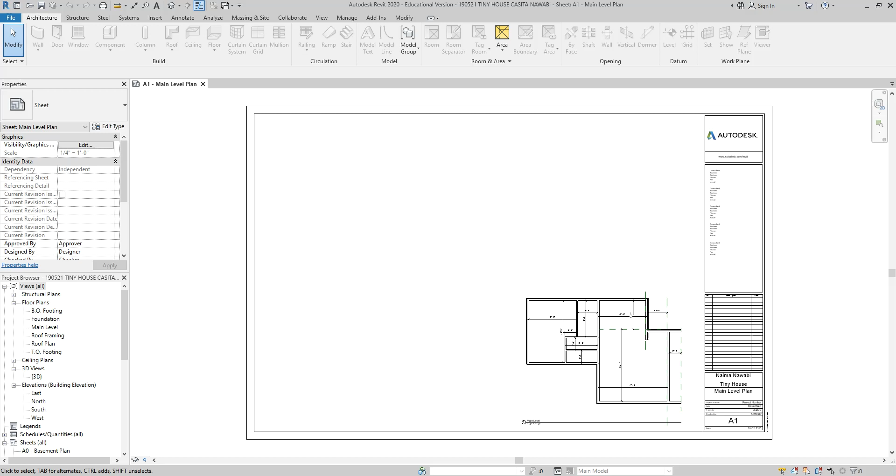Let's go ahead and get started. I know it's only been a couple days since we were here last, but to me it feels like it was a week ago. It's just been a really busy few days.

Just a quick show of hands - before class we were talking, and several people jumped right into the tiny house project. How many of you didn't have a chance to jump in? Okay, that's fine. So the people who were late also didn't have a chance to jump in. I'll let you analyze that for yourselves. Okay, let's leave that be for now.

I wanted to bring that up because maybe the few of you who were able to jump in could give me some feedback - not things that we haven't gone over, but of the things we have gone over, like starting up files, the things we think about when first starting a project. Was there anything that didn't feel intuitive yet, or didn't feel like it was on the way to being intuitive?

Does that make sense, what I'm asking? Or do you think we've gone over the step by step, this is what you do, to where you're like, okay, I think I get this rhythm, I just need to practice it? It feels pretty good. I think with practice it just gets even better. Starting out I felt a little slower, but I'm like, okay, I have to do it this way. In time.

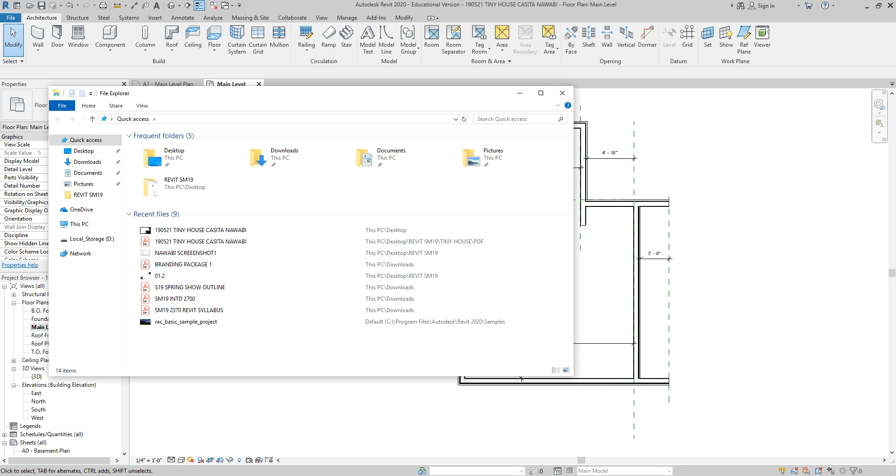Next week, what I'm planning on doing is the first hour of class, I'm going to give you guys a small floor plan - I'll download it before class. I'm not going to post this yet, but I want you guys to know what you're getting into. Let me pull this up - I'd like to jump ahead a little bit so that this weekend everybody will have time to work on Revit because of the assignment that's coming up, in case you feel there's something you need to practice before the first hour of next week.

So the first hour of next week, what I'm going to do is give you guys this small floor plan or something similar. My hope is that within that first hour, maybe less, you guys will be able to lay out this entire plan with the windows, the doors, and then maybe if you feel comfortable, even throw on a roof. I'm not sure, but if we're not going to do the roof, at least lay out a couple sheets for me. I'm going to have you guys turn in those PDFs as well as your Revit model - I'll look through those privately.

But then as a group, I'll have you guys get together in smaller groups again and analyze each other's models. For instance, Jules and Deshina, you might switch places, and Valerie, you might go with them. I want you guys to be able to click on each other's walls and say, oh, did you notice that these were unconnected?

I noticed when you were working on your screen, you're only working in floor plan. Did you remember to open up your other views to help you with those other things?

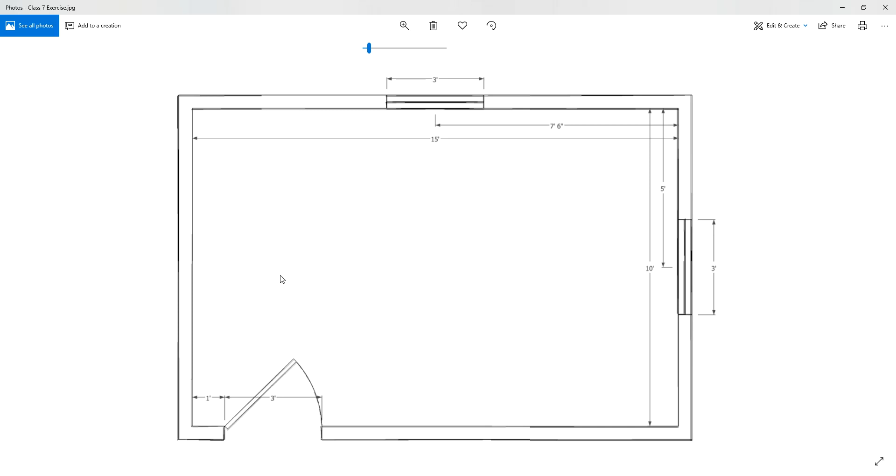Just remember, beginning of class I'll have that posted on Canvas, and I'll have it close, meaning it's due basically at like 7 or 7:05. I'll want your Revit model and your PDFs, but everything will be in Canvas as well as the rubric. So watch out for that next week.

Now for this evening's class, if you're okay, I'd like to jump a little ahead and start going into windows and doors. Tonight's class is actually supposed to be a review of walls and setting up the file, but instead I'm going to throw one more thing at you: windows and doors.

Next week, after you do your 1 hour, we'll see how things went, and I'll spend most of the rest of class hosting a lab, going over questions or things that didn't work out. If we get through those within another 30 minutes to an hour and a half, I'll do a quick introduction of the next topic, which will be some views.

Again, I'm trying to preserve as much lab time at the end as possible. So even if we end up 2 weeks ahead of schedule, that's great - that's 2 extra weeks we get to work on our final.

So are you guys okay if we just jump right into doors and windows, things like that? A quick question, please. Sorry, it never has to be quick.

I'm having difficulty just logging into Canvas even. Oh, what is it saying? There's an authentication error, and I just keep getting it, and I don't know why. Do me a favor, try to log in from your phone.

Coming back over here, I'm not going to spend any time reviewing our floor plans because I think by the end of class we all had the same thing. If you have questions on whether our floor plans are the same, or if something's off on yours compared to my screen, just hop into the YouTube lecture, fast forward to the very end of our last class, and you can verify those dimensions.

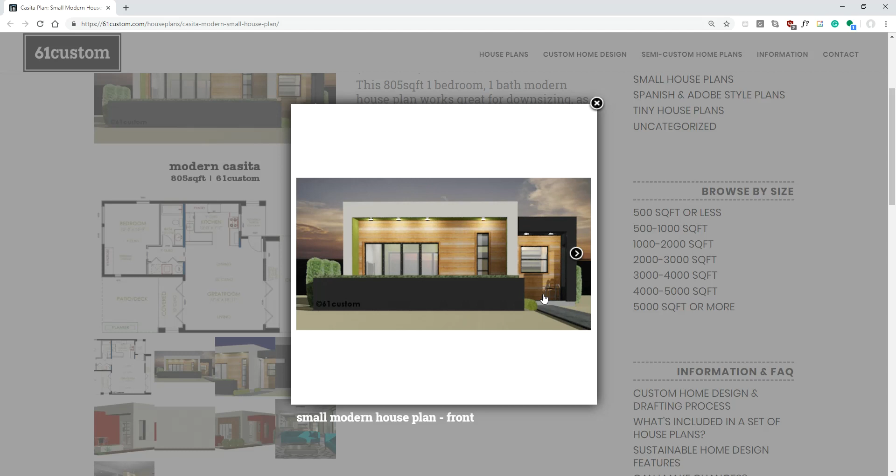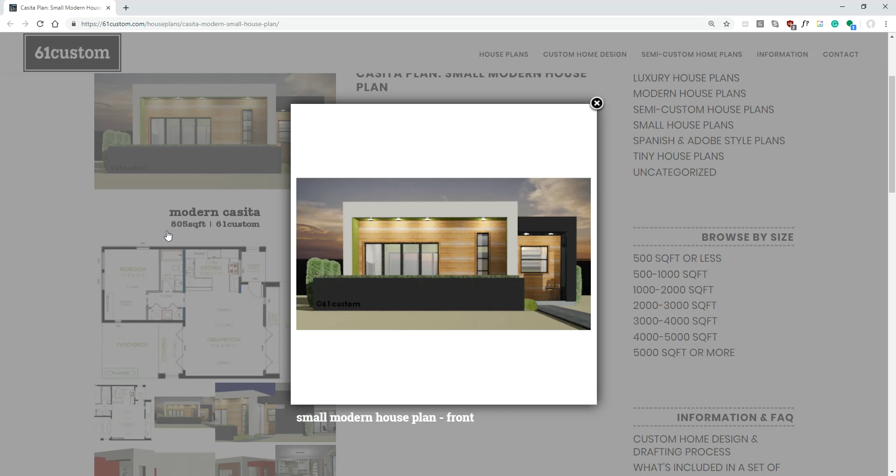What we're going to do right now is use the floor plan and our elevations to essentially walk around the house and figure out the sizes of our windows. I'm going to document them up on the wall. Before you guys go tonight, you can take a picture of the board, because this plan, as you may have seen, is really similar to the other one. Raquel, wouldn't you agree the plans are really similar? So if you want to take note of the similarities, you can grab some of the dimensions here. I'm going to start in our bedroom.

I'm going to go through the elevations and see what type of windows these are, but let's just eyeball it right now. If this is a 3-foot door here, what do you guys think about this window—bigger or smaller than 3 feet, or about 3 feet? About 3 feet, okay. So if this is a 3-foot window, these would apparently be larger. Let's say we have a 3-foot window here and maybe 3.5 feet there, or even 4 feet. You'd say 4? Okay, so we've got 3, 4, 4, and then what? 12? 18? It's almost half this, so maybe 18 right there. If I put my pinky here, it fits perfectly, and I got 2 pinkies right there—I'm going to say that one is half of that. That's how exact I am.

Did Kristen do the whole perfect and precise thing in AutoCAD? Yes. Okay, that's my motto, y'all. Don't tell her I'm using my pinky in this class.

She'll die. Okay, I wish I had a projector that actually worked so I could write on the board. Let me just sketch it really roughly here since there are only a few windows. Remember people, my master's degree will be at work here. I'm going to call this one A, not even showing the rooms. I'm going to call both of these B because they're the same window, and I'll call that one C.

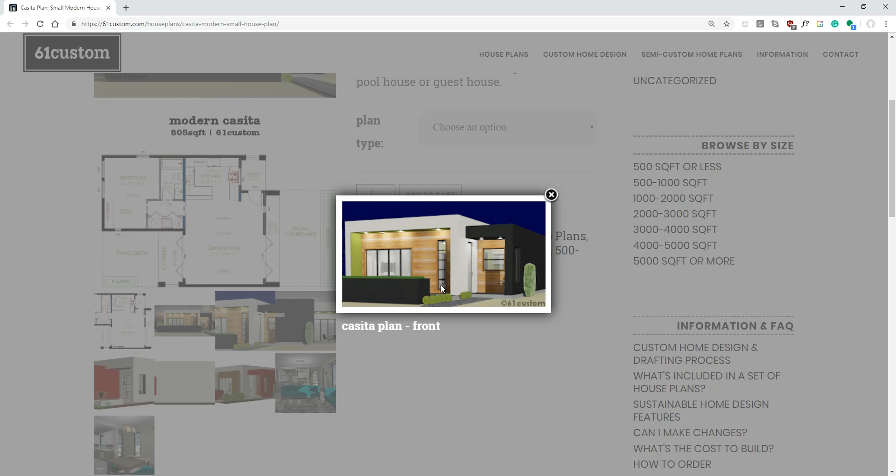Okay, good, we've got a little bit more information there. I'll keep zooming around. So now we've got those same doors in the back. Those aren't our windows, those are the double doors. But we've got these windows right here in the bedroom.

Those are our Bs, 4 feet by, what do you guys think? 18 inches, yeah, those are very private, almost like a transom window. And I might have to flip this around one more time, because do you see how this almost looks like it comes up to that higher level too? Like if this is our door right here.

So I'm just gonna put a note right here: higher head height. We'll leave them standard for now, but we'll raise them up in just a bit.

Whoops, wrong one. Oh wait, this one, and this one. That looks like a funny little face.

Okay, did we get most of them? Almost. Oh look, this one here goes all the way down to the ground. You guys see that one? Okay, so that is this window right here.

And let's keep it at the 7.5, because again, we're the designers, it's our sketch, so we'll just keep both of these C windows the same. Okay, we'll keep them.

I think the patio comes up. Right? Probably, yeah, it should be the same. And I would assume that even in the front, on that side, there could be like a patio too, or some sort of landscaping that they just left out. So it's probably at the same height, but just the way that it looks.

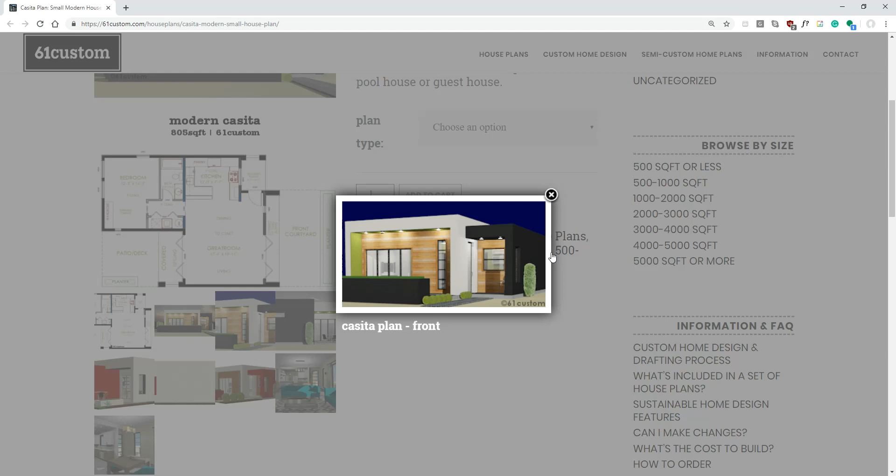Yep, and let's hop back here. One more. Okay, so it did leave off that bottom one. Yeah. So I mean, again, this is just our sketch, we're the designers. I would say for tonight, let's leave them the same to start.

And then when I kind of leave you off to go off on your own way, then you guys can kind of play with it a little bit more. Okay, and then here, it's just an opening. So you can see, wait, is that the same opening? I think so, let me look over here. Yeah, so that's just our X.

So if this is 3 feet here, how tall do you guys think that is? About 5-ish feet? Yeah, I'd agree. And we'll see how that looks once we get it in there. And I think that's all of our information, right, that we need just to get started.

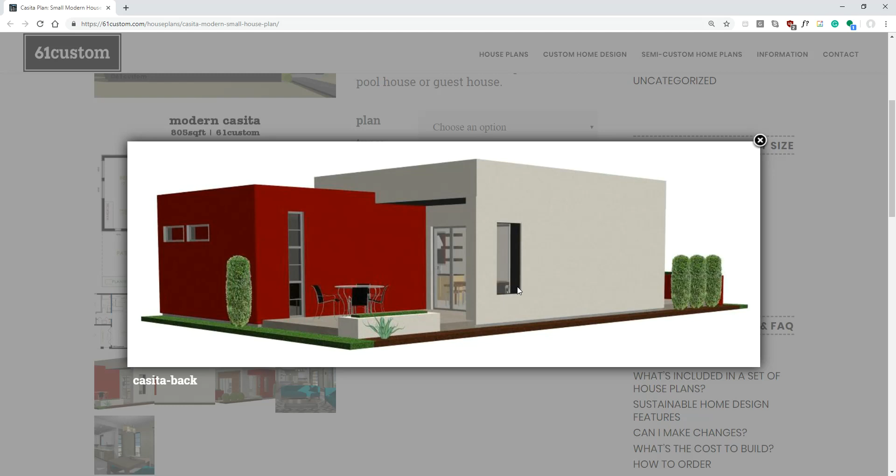We'll come back and do the doors in just a bit, but I think that now that we have the windows done, I think the doors will be easier. Okay, so I'm going to pull this up one more time. So here's all of our windows now that we've looked, and our openings. Now that we've looked at our elevations, we have more information. Then once we get our windows in, then we can come through and do our doors as well.

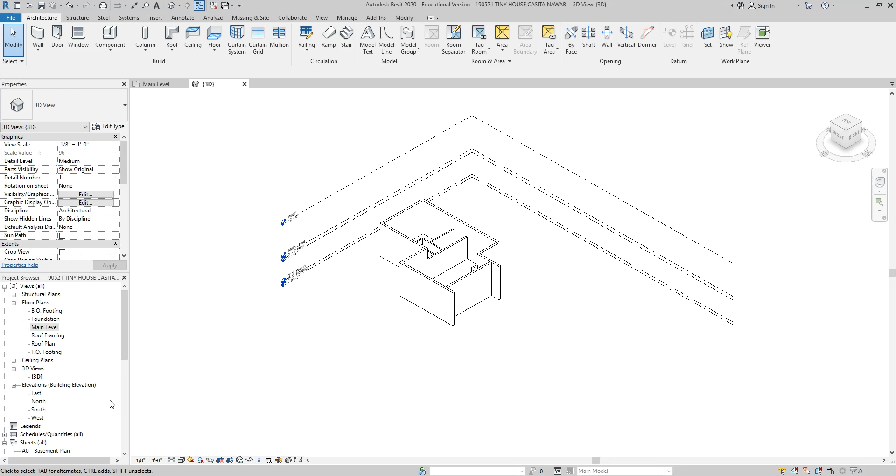Okay, so let's hop into Revit. And for this, I'm going to do that same thing where I open up a few different views. So for this one, I think I want to go my 3D view and maybe even my elevation. So I will do my north elevation to start.

The sound of that rusty little fan is going to be driving me crazy all night. It's so sad.

Okay, is everybody at a good spot to get going from here? Does anybody still need a minute?

Okay, so let's go ahead and start talking about our openings then. The last time we worked, we went through walls, W-A, and now we want to jump into windows, which are W-N, if you want to do the shortcut. And a few things will be slightly similar.

So if I type in W-N, you will see that by default, just like my walls, I will have a specific window loaded up here, okay? Now in your architecture template, there might only be this fixed with trim. I don't think there's many more windows, okay? But here there are a few more.

Now one thing that will be a little bit different than our walls is we can actually come through and load different types of windows. If you were here on the first night of class, we did that crash course into Revit where we kind of already talked about this.

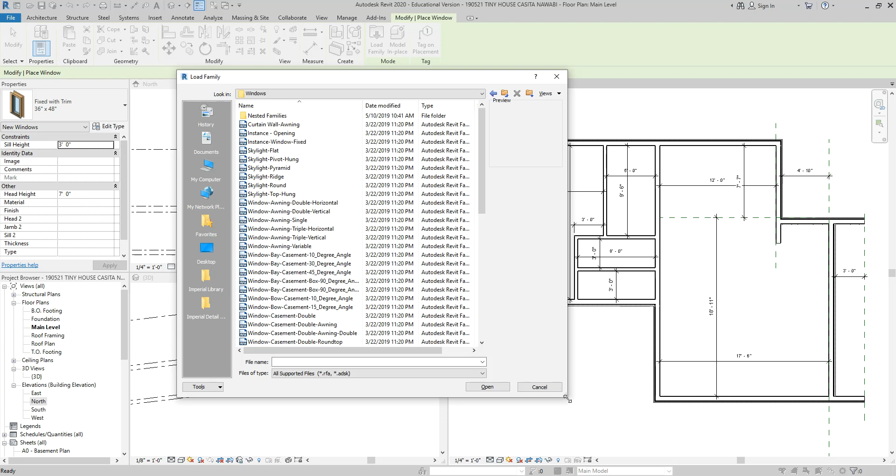Now there are so many windows loaded up in here, and if you click on them you can get a preview of what they look like. But even with all these windows, you might find it's a little bit hard finding something that works with a project like this, that's pretty modern I would say. So take a look for just a minute, see if there's something in here that you like, or if you just want to use a really standard window type, we can just do that fixed window. I'll let you guys look for just a bit.

Anything calling out to you guys? What do you think, is there a window that you guys want to load? I'm happy with fixed. Yeah? Anybody else see something in there? Or no? What's the instance window fixed? Instance.

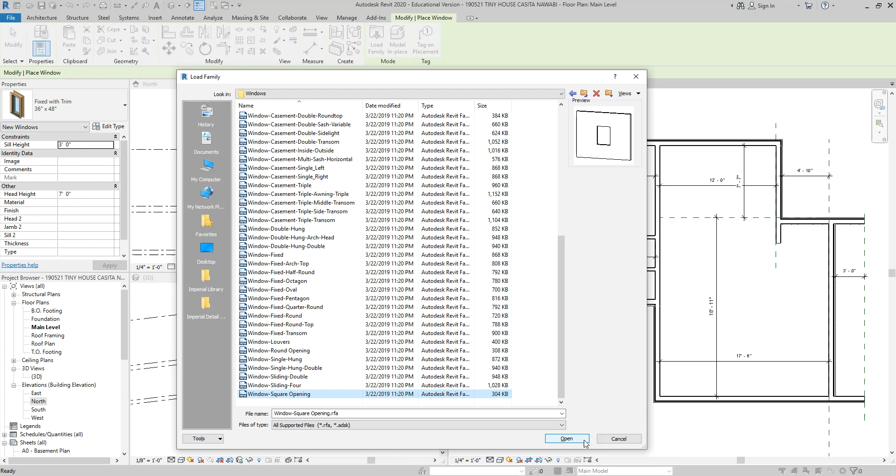Okay, so it won't be very exciting, but let's just practice loading one in. Why don't we do a window square opening, right? So down at the very bottom there's window square opening. Let's start with that so we can start putting in our openings that I have up there on the board. Go ahead and click on open. It's already asking me to save the project.

Here, by default, the size is 36 by 48, okay? Now what size do we want it to be? 3x5, yep, we want it to be 3x5, so it's really close. Now you guys already know how to do this, even though you might not know that you know how to do this. If you wanted to change the square opening size, the first question is, can you? Yeah. Okay, if you were to change it, what do you think you'd click on? Edit type. So what is that similar to? Where have we used that before? With our walls, yeah. So we're going to click on edit type.

Should we go ahead and change the size now? No, good, we shouldn't. What should we do first? Perfect, so we're going to duplicate it, and then this time we're going to rename it to 36 by 60, right, just to make it consistent. Then we're going to click OK. Do you see that it's naming it as rough height, not just height? So we're going to make that 5 feet. So now we have a 3x5.

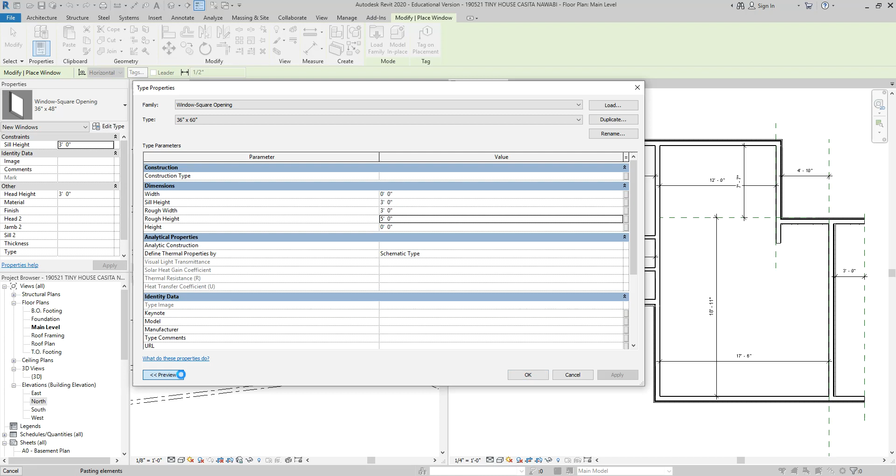You can even look at my little preview here.

Okay, and if that looks good, we can click OK. I'm going to come back to our floor plan here. So it looks like our openings are just kind of centered in these little walls. I hope I have both of them in there. Let me check real quick. I don't, but I can easily get them in. So I'm going to hit escape for now.

I'm just going to drag this over, and drag this out too. I'm just going to copy the dimensions. I think this is, yep, 4 feet 10. I'm going to do the same 4 feet 10 out here.

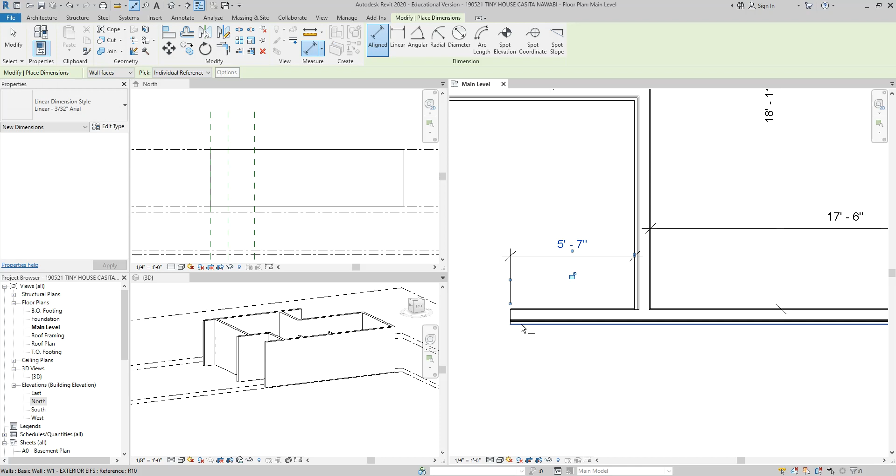And then with the window, do you guys mind looking at my screen for just a moment? Do you see that those quick dimensions came up, the temporary dimensions? See how the temporary dimensions aren't really helping me yet? It's weird, it's giving me a no, but it's still letting me move it. So oddly enough, it went in centered, but I didn't know it was centered or equal until I clicked on these points. I'm going to try that one more time down here, and make it off so I can use my reference dimensions.

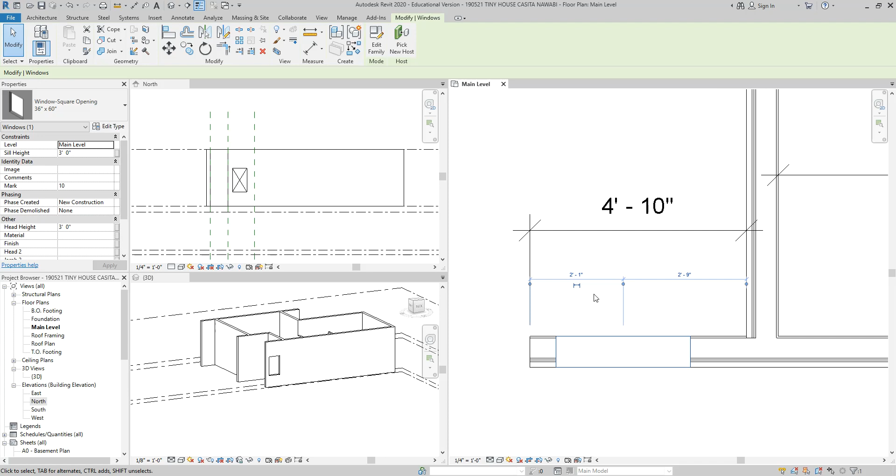Okay, so now that I've got those in there, I want to make this equal. Oh, I hate this, this is a new thing. I actually have to put the dimensions in, and now I can make it equal, and it'll put it in the center.

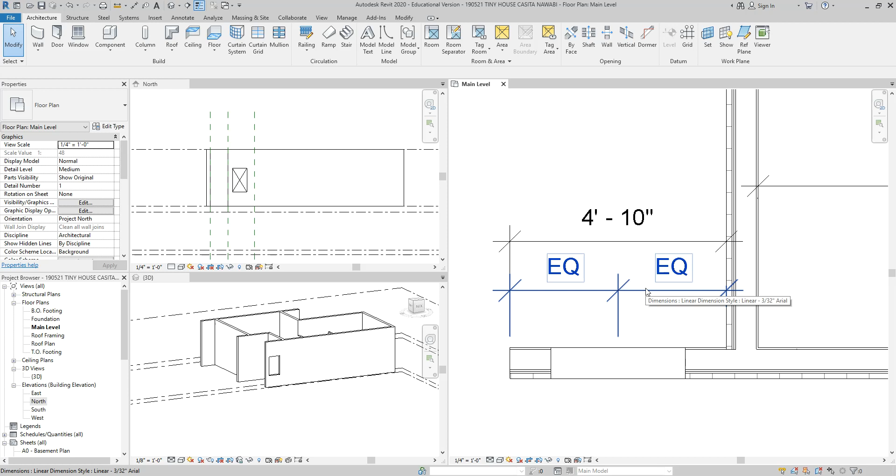So let me show you that one more time. You guys mind looking one more time? I'm just going to click on the window and see how I have my temporary dimensions. Unfortunately, with the update, my equal is gone now with my temporary dimensions. For that to pull up, I have to click this button right here to make the dimensions permanent, which just means it'll come up on my screen. And now when I click the dimensions, do you see that the EQ sign comes up now? If I click on equal, it'll take that window and put it in the center. So there's one extra step. I'm gonna have to talk to Revit about why they added that one extra step.

And again, if I'm looking in 3D, I can kind of spin this around, but I think that looks pretty good from what it was supposed to look like.

If you didn't get both of the openings in, you can come back and put them in and center. I just wanted to walk you guys through a couple more windows, and then I'll leave you to it to kind of finish them up.

So let's plan on at least doing window, we just did the opening, let's do window A and B together. Or maybe just window A. I want you guys to try the rest of them together.

So for window A, I think we decided that we are just going to do the fixed with trim, so it looks really clean in our model. And I don't think we're going to see the 3x3 here. Pretty close, so let's do it this way.

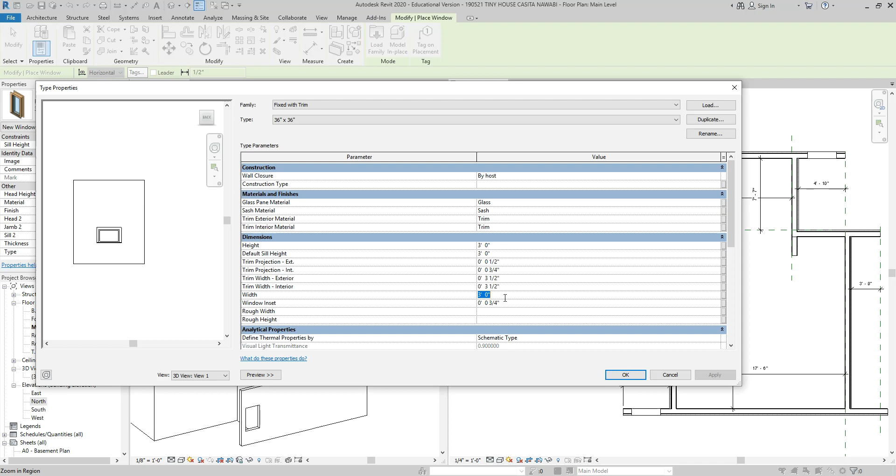Okay, so we've got our 3 foot by 3 foot. Caitlin, how do I get out of here? Yep, so I press OK. And then I'm just going to, this is window, is this window A? Yeah, I'm sorry, I keep looking behind me like I'm super surprised. I'm just going to throw this in here.

And let me go back to the plan. So Raquel, I'm going to put you on hold for just one moment. Would you guys agree that the window looks like it's about 2.5 feet away from that wall? Okay, Raquel, tell me how to get the window 2.5 feet away from that wall.

Yes. Maybe. Brooke, what about you? What would you do? Type in on the dimension... Yep, on the right, 2.5.

You put in your dimension string first, right? Are you talking about the ones that just popped up? Oh, did they actually have one? Yeah, right there. Sweet, okay. I clicked that far right dot to make sure it was on the inner face of the wall. Got it, okay. And then you just did 2.5 from here? That works, okay, I love it.

I didn't even think to do the temporary dimensions. I just was going to go straight into doing dimensions, so that's good.

All right, what was that? 2.5, which is 2.5 feet, or 2 feet 6 inches. God bless the imperial system, it's so confusing. Okay, so we've got this one in.

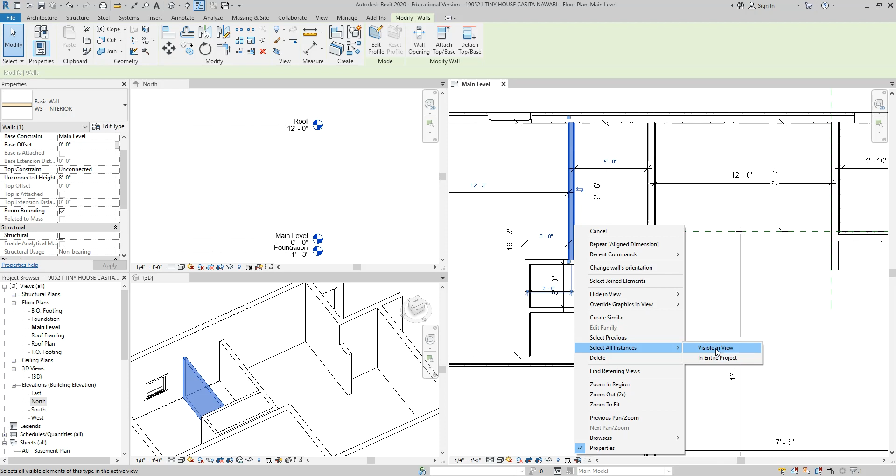In this project, it doesn't make a difference which one I do, but it grabs all those walls. I'll step back though. If you wanted to select more than one item by clicking on it, you hold the control key down. When you do that, look at my screen, do you see that plus sign? That lets me add the walls. So either control or right-click select similar got me all the walls.

Okay, so now Emily, now that they're all selected, what would you do? I go over to the properties. Good, the wall, then pick top constraint and change it to the roof. Yeah, so I'm gonna jump that up to the roof, and now mine almost looks like yours, right? I just have this other wall type, the wall 2.

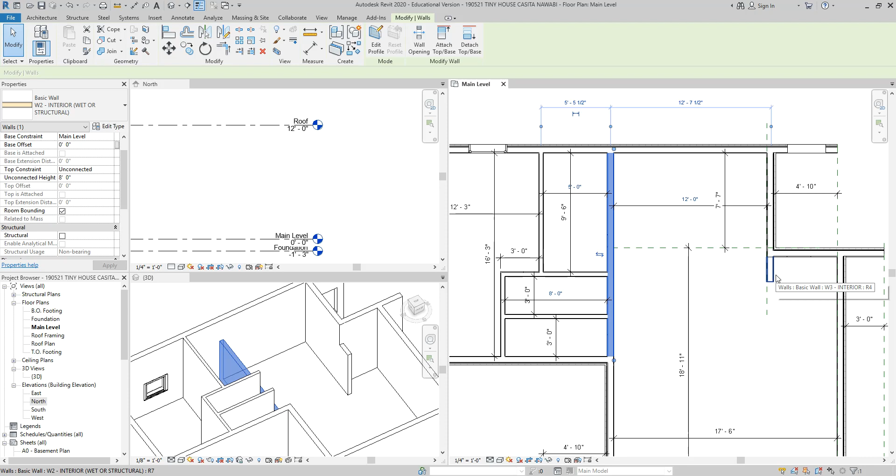Okay, so I can do that same thing. This one there's only two. I'm not gonna do right-click select similar, but I'll hold the control key, add that in there, and then come up to the top constraint roof. All right, and now Jules, does my model look more like yours, like what you're working on? Okay, thanks for even noticing that.

I'm going to sneak one other thing in there as you guys are working. When we put in our windows, one thing that I didn't specify was essentially the head height. Okay, I am recording. If I come over here and take a look at where this window actually is, I don't know exactly where it's taking the head height from.

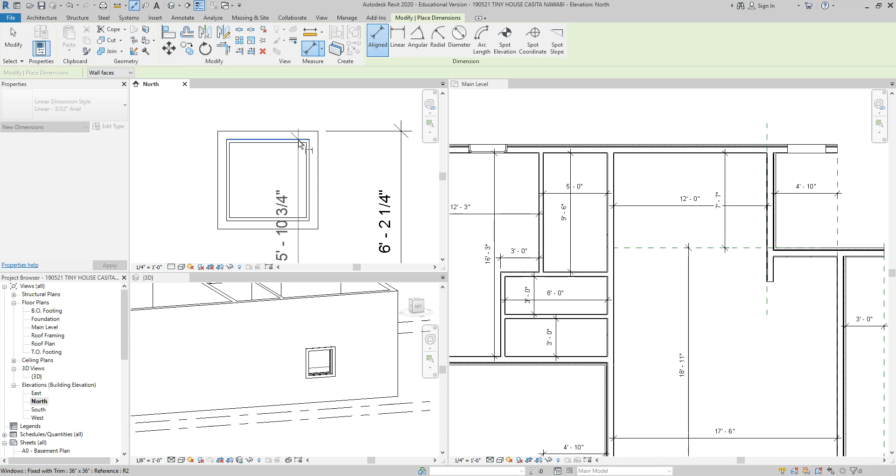Okay, 6 feet, so not there. It doesn't take it at the trim. Let me find that 6 foot mark. Well, that's embarrassing, where's the 6 foot mark that it's measuring from? Right now it's saying the head height is at 6 feet, but I think we agreed we're going to do our head height at 7 feet. And the 7 foot line is this line right here that I need to snap to.

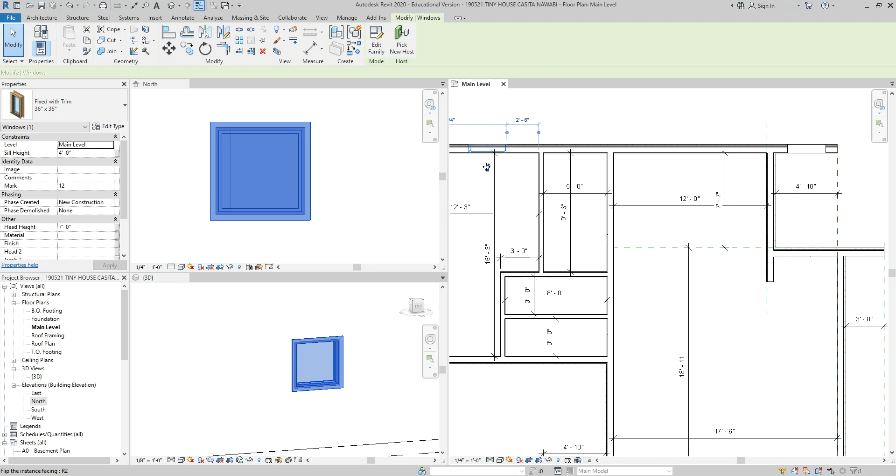I don't know, maybe did I put in this window backwards? Let me flip that window. There we go, I put the window on the wrong face. It's hard for me to tell in floor plan which way it's supposed to go, only because sometimes the trim's on the inside, sometimes it's on the outside.

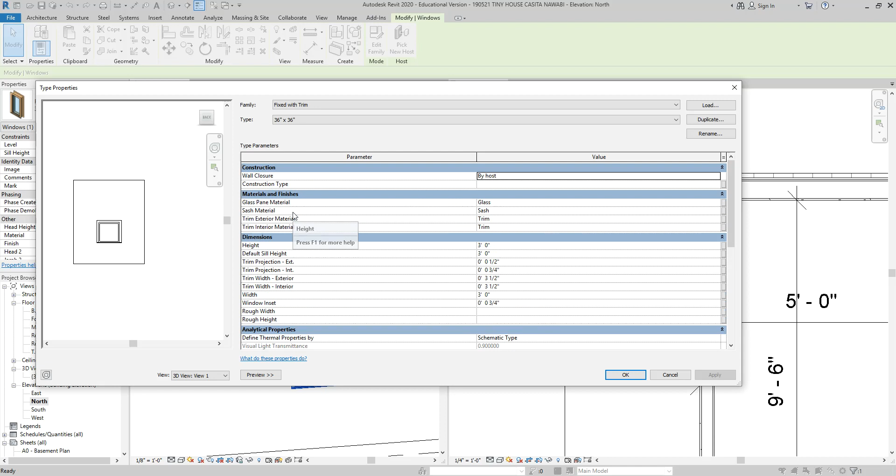So again, the way that I did that, I clicked on the window, and under Other, there's head height. Now let me go back into Edit Type. I have always had to do my head height in that menu and not in the family menu, because you could have several 3 foot by 3 foot windows but at different head heights, so those you set individually.

Okay, so I think as you guys go through your windows, one thing to also consider are the head heights that we talked about. Again, all of them will be at about the 7 foot mark, minus this guy that's a little bit taller. That looked like it was going to be higher than the rest. Okay, so keep that in mind.

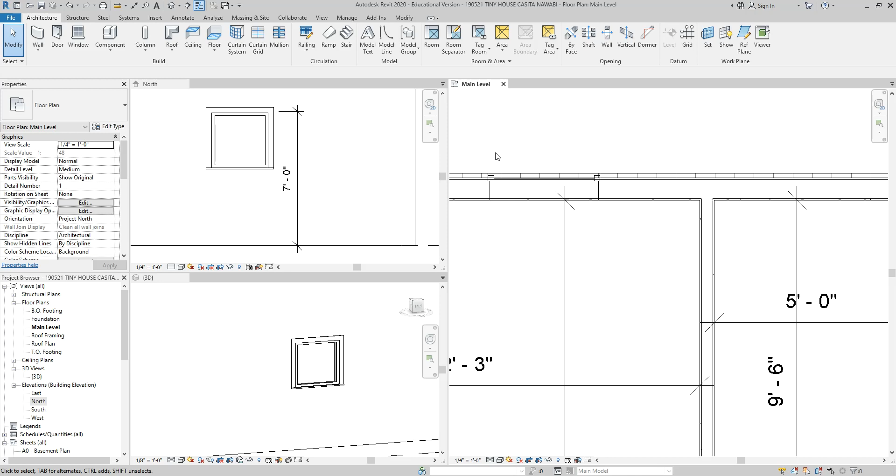I'm gonna go ahead and just get started. Everything that we'll talk about, I'll put on the board so you guys can reference it later. But the last thing that we have left is to put in our doors. And sometimes this is the trickiest part because we have 2 standard doors, one pocket door right here, and then an accordion door.

What I want you guys to do real quick before we even get started, will you look through our Revit library, you know, where we load families? You guys know where the door button is, I don't think I need to point that out. But let me know, out of all of these door types—1, 2, 3, 4—how many of them do we have something similar loaded in Revit that we can actually use for this project?

Without spending too much time on that, the quick glance you've had, are you guys finding some limitations on the door types? Yep, okay. And Jules, you mentioned you couldn't find an accordion door, right? I think you're probably correct in that.

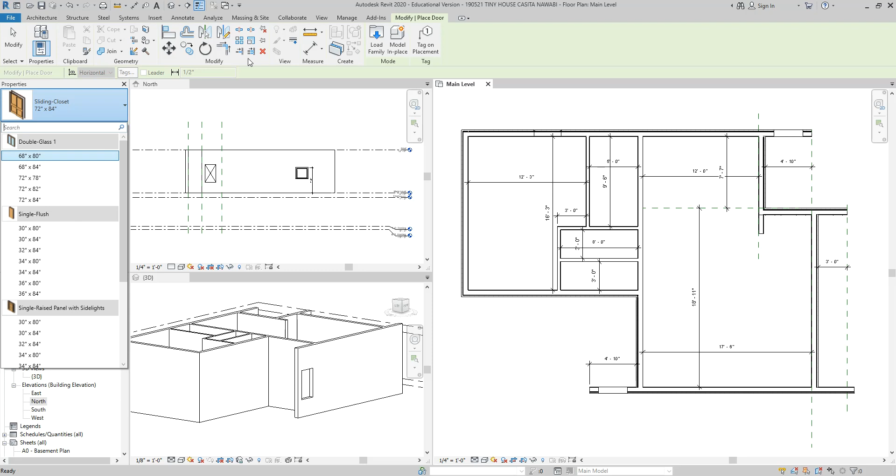If you go to door, there are sliding closet doors we can use - those are already in the project. We can probably use this double glass door rather than those beautiful big glass accordion doors that it's showing. But for now, if I go to my door menu, let me go to residential. I've got lots of pocket doors, but Revit does not like the accordion doors.

It's not to say you can't go somewhere and download these things, but we're at least a week away from that. So next week we might get to it. It's actually reserved for week 4, so we're 2 weeks away, but the way we're going I think it's gonna come up sooner than later. So just know that in time I will give you guys some resources where you can download furniture, doors, even windows if you want to get that detailed. There are so many models and manufacturers out there you guys can use to add greater detail to your model.

So there will be some limitations this week as far as what you put in, but let's try to do our best and fill in the information based on what we have. We can easily do these 3 doors, but I'd say for now in our hallway, let's do maybe a sliding door, and you can pick which sliding door you want. And out here, maybe do the double glass slider I pointed out at the beginning. We're kind of making do with what we have, and maybe for this project you can choose to upgrade it, or at least for our midterm, you can have access to all the internet downloads you want if you choose.

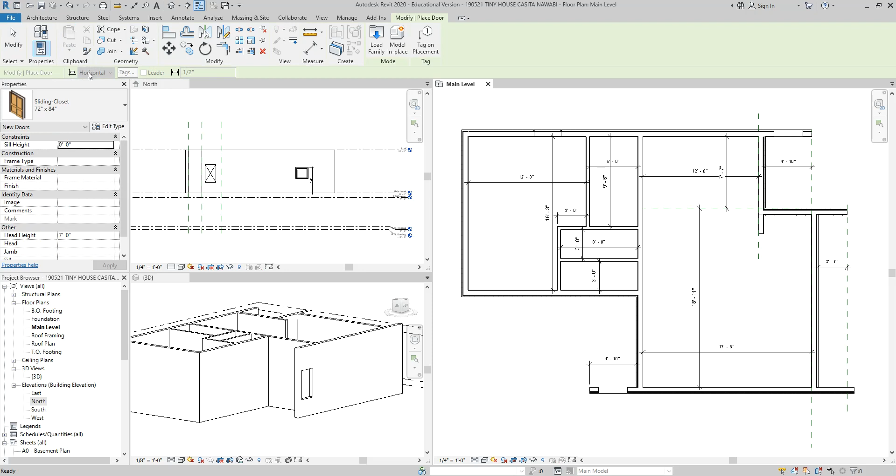But the style of door is really up to you guys. You have that whole library, so you can do a glass door, you could do raised panel doors - everything is here in your door library. When you go to load family, you just go back to the doors. There's commercial here, but in residential you might find more of what you're looking for. Do you guys feel comfortable looking through that on your own?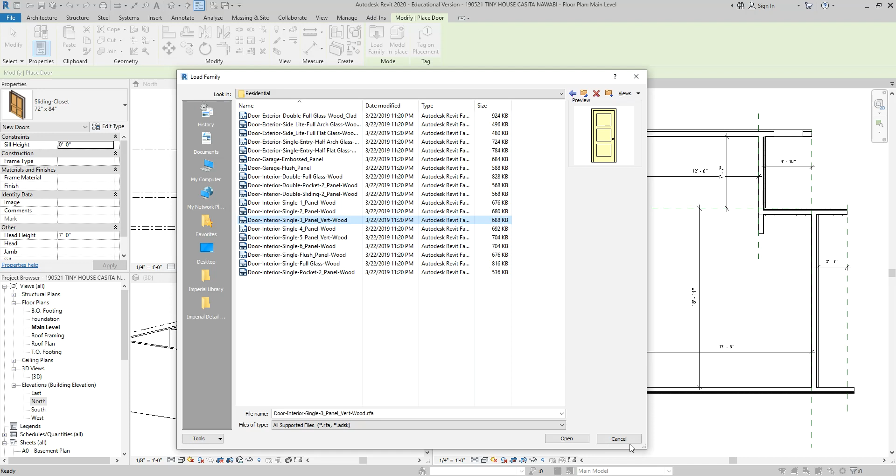Okay, I'm going to see how it goes without helping you with this particular family. I'll check in about 5 minutes to see how it went.

One more time, what I'd like to do, even though it's a little early, I want to go over the homework one more time because it's technically our first week of homework, so I want to make sure it's clear since it's due Tuesday. If there's any questions, you guys can ask here tonight - if you go home and have a question, nobody else will be here to hear it. So if there's a question one of you have, I'm sure several of you will have it. First, let's make sure we know where to find our homework.

Before I get too far, I'm going to switch to student view so I see what you see. Okay, I'm in student view now. So what we'll be doing this week, it seems like a lot, but there's going to be 4 things you'll have to turn in on Tuesday. One of them isn't listed here, but here's what I'll be looking for. I'm going to open up all of them in new tabs.

So the first one is our tiny house. This is the exercise we've been working on here in class. What I'll be looking for is to make sure your walls are created, so I will need your Revit file submitted and your PDF submitted.

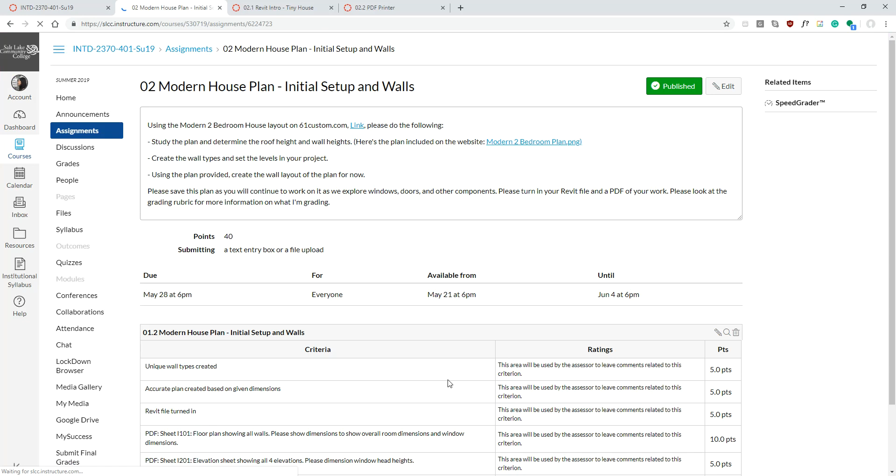So while I'm thinking about it, let me leave student view for just a moment, and I will keep my word and not grade you on the windows yet. I'm going to keep the overall room dimensions, but I'll take the window dimensions off for now. Fair enough?

Okay, now we're really sticking to what we've done this week. And the last two sheets: I-201, the elevation sheet showing all 4 elevations, and I-901, a 3D view on a sheet. You might have to do some review since I'm asking for views—I want you to put it on sheets, so you might have to review printing one more time, and that's separate if you want to take a look at it.

And then the printer, we already talked about. For this one, I just want a PDF sample to scale, so you could even resubmit one of your assignments that you're already turning in. I just want to make sure everything works and is going well. This was posted so you'd have the links. We practiced it here in the lab, and I just want you to do one more at home to make sure it's working. Any questions so far?

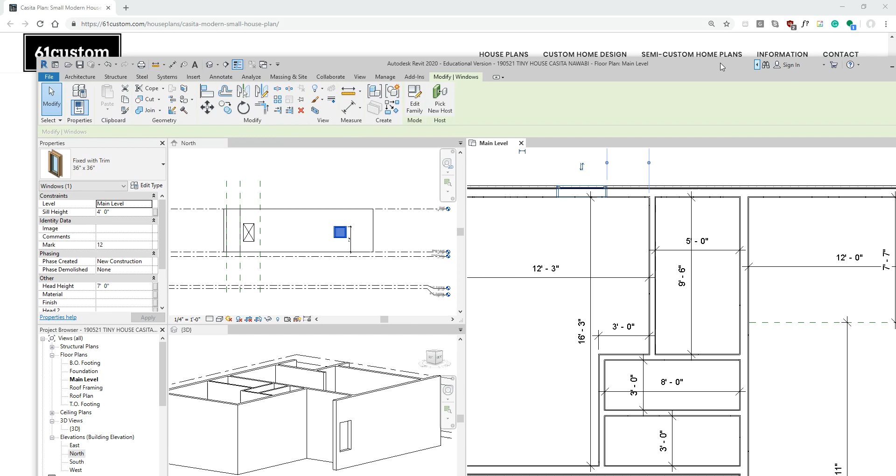Okay, so for the interior, there's the hallway where currently we just have that wall there. So I went ahead and put a door opening, that's exactly what we're looking for. So what if we just wanted to remove that portion of the wall?

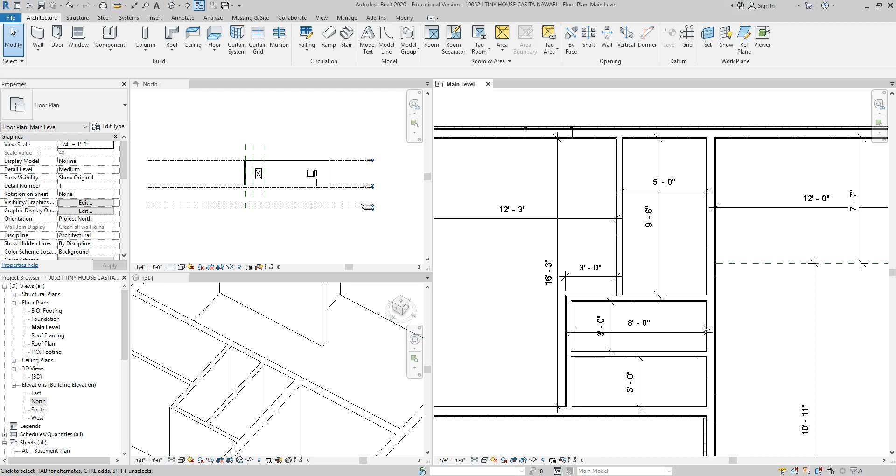So you could do that, but let me describe what's going on structurally there. What Jules is asking right now, in our hallway right here on the floor plan, if you look at the website, there is an opening here, but there isn't a door.

Similar to a window opening, if you go to doors, there's also a door opening. Have you guys found that on your own? If you haven't yet, you can just go to your door menu and see that there's an opening there. Now, if you look at this door right here, pretend that there's not a door, but there's just an opening here.

In most settings, there's almost always going to be a header because you need some sort of structure above that opening. It's really uncommon, I think our ceilings right now, well, it's going up to the roof, so they're like 10 feet. It's really uncommon to have 10 feet all the way up, just to have those two planes come down, but it isn't unheard of to do something like that.

But I would say just for this example, just to practice putting in the door opening, I would keep the door opening in there so you still have a header for whatever reason. But if you did want to create a space that's truly just an opening that goes all the way up, then you would actually terminate your wall, leave a blank space, and then start drawing your wall again. You just completely terminate the wall.